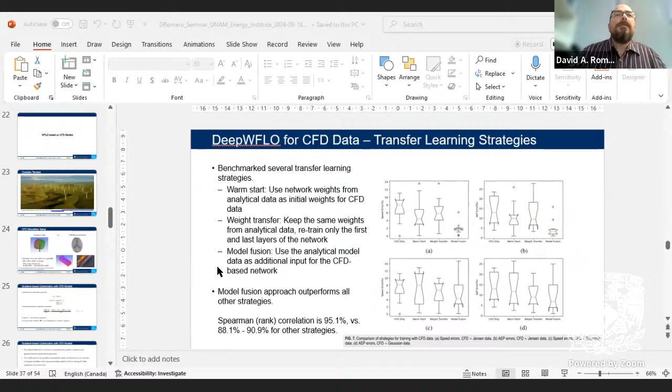Okay, let's do that right now. Okay, I think you should be seeing my slides projected. Okay, we can see your shared screen. Okay, so thank you very much.

Well, thank you very much for the invitation to speak today. It's an honor to be part of this seminar, which I would like to attend in the future to learn about the interesting research you guys are exposed to. As Carlos mentioned, my topic today is physics-based, physics-informed, and data-driven methods for wind farm layout optimization and control. The idea today is to go a bit over the work our lab has done over the last few years.

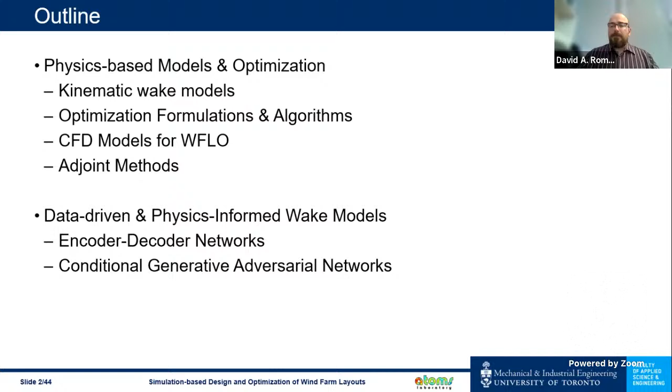It's a bit of a summary of previous work and some description of current focus areas. In terms of previous work, we'll talk about physics-based models and optimization, which has been our work until probably a couple of years ago, and more recent work in data-driven and physics-informed neural networks that we're using for this application.

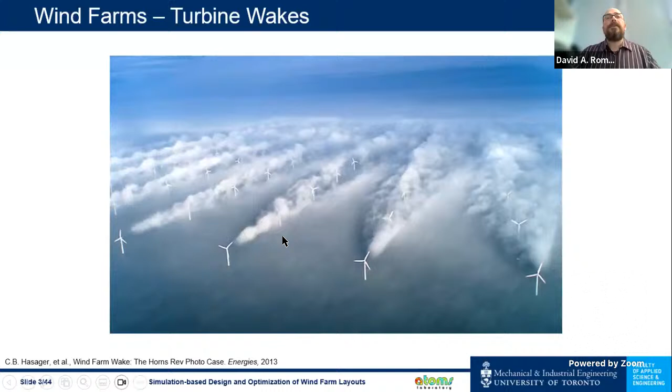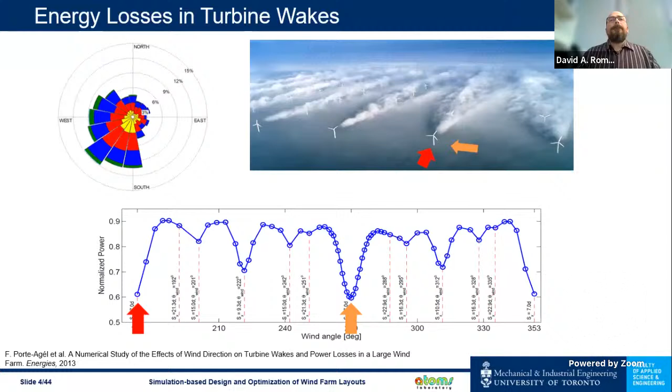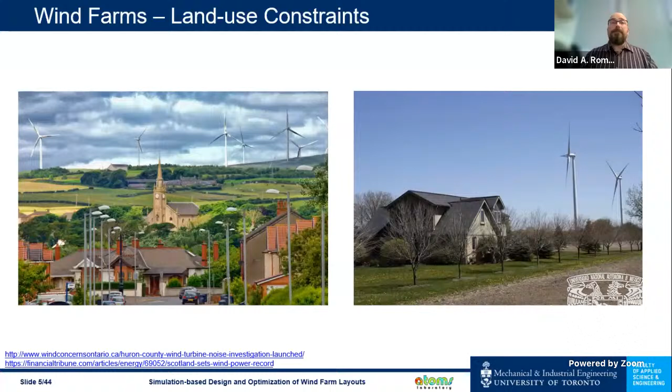So we'll go a little bit over that today. Another important aspect of wind farm layout optimization is consideration of land use constraints and environmental impact, which play a significant role in industrial practice, not so much in research work. There are many restrictions on where turbines can be placed within a given terrain, and terrain features will affect the flow, which also has to be taken into account. As an example, this information is for a jurisdiction like Ontario, Canada.

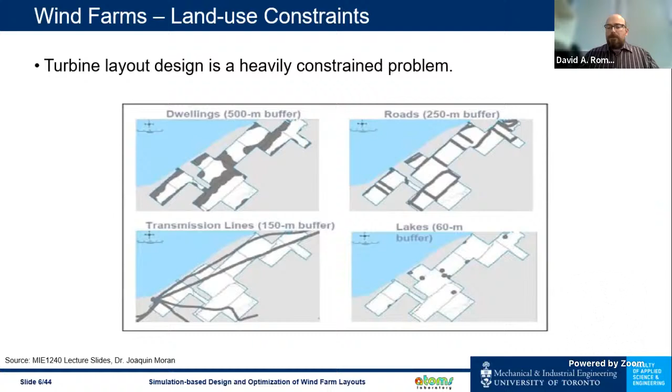So once you consider all these restrictions, instead of placing turbines anywhere, you can only place them in the areas colored here in this image. This makes what an optimal layout is less obvious, more difficult to obtain for sure.

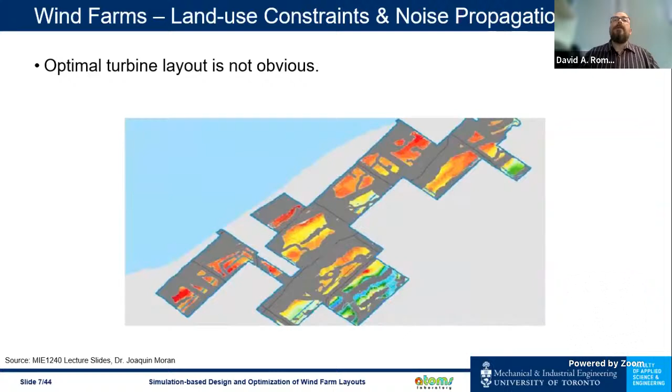Informed by our collaborations with an industrial partner that actually designs and commissions wind farms, we decided to tackle this problem a while ago. Generally, wake losses can be a 10 to 30% decrease in annual energy production.

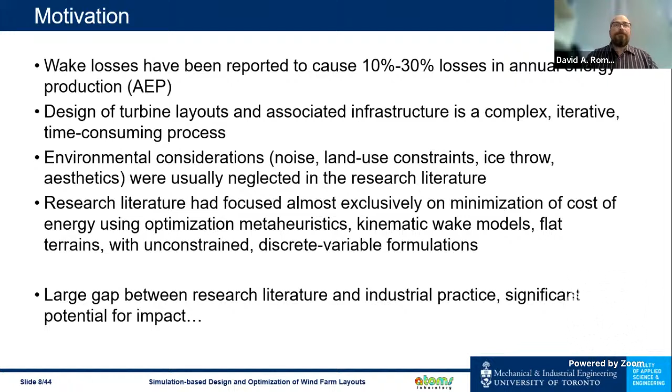Designing the layouts and infrastructure is a complex task, and there are many considerations to be taken. What we saw was that the literature only dealt with energy generation but ignored other types of constraints. So that's why we decided to take a look at this area.

So in the first part of the presentation, the optimization work we're going to see is based on what are called kinematic wake models.

Basically, if you look at the picture on the top right, that's a top view of a turbine with the incoming wind flow and sort of what the wake region is supposed to be and the effect it has on the flow. These models have different levels of using conservation of mass and conservation of momentum to try to come up with an analytical expression for what the wind speed is behind the turbine and how it recovers.

The simplest model is the one shown here. It's a Jensen model, considers a linearly expanding wake, and focuses only on mass conservation.

And the prediction of this model is what you see in the blue line in the plot in the bottom right. Basically, for whatever free stream wind velocity you have, once you hit the turbine, it decreases significantly, about 60%, and then it recovers following that pattern.

The horizontal axis is a non-dimensional distance, counting the turbine rotor diameter. So you can see that about 20 turbine diameters away, which could be up to 2 kilometers for the biggest turbines, you get 90-something percent recovery.

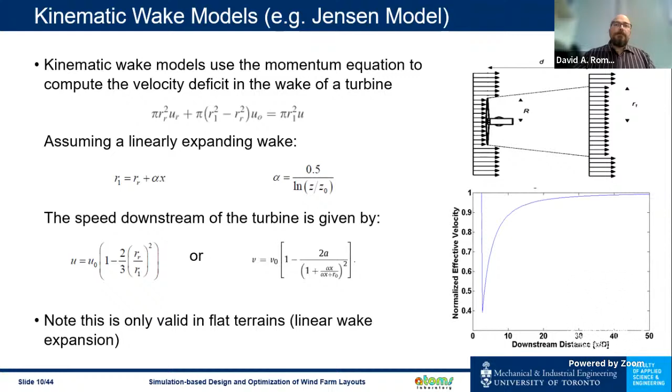But this model is only valid in flat terrains, and it has significant assumptions, but it has been used a lot in the literature and in industrial practice because it's simple to evaluate, and it gives, for something so simple, reasonable results. You will see error levels in a future slide.

The other aspect is once we have a turbine that is in the wake of several upstream turbines, we have to find a way of combining the effect of multiple turbines upstream.

And many options for that too, shown here in this slide, but the most common one, which is also the most accurate, is the sum of kinetic energy deficits, which is the third expression.

Using that, you end up with a behavior like the one shown in the bottom plot, in which after each turbine you have a decrease in the wind speed. That decrease is less and less the further turbines you get. And after the last one, you get a full recovery eventually after 40 or 50 diameters.

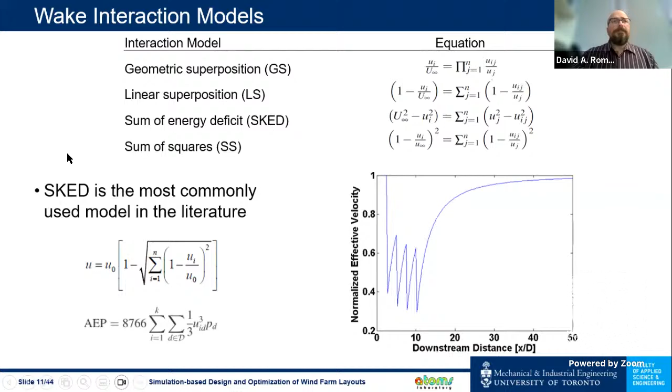So these two tools, the single wake model and the wake combination model, is what a lot of people have used for research work in wind farm optimization. And that's also the basis for the first part of our work.

So in this space, we focus on problem formulations and algorithms for solution. And we first look at metaheuristics, like genetic algorithms, those kinds of nature-mimicking algorithms.

For different types of formulations, considering the turbine locations as continuous variables or as discrete variables, and considering land use constraints or environmental impacts, different ways of formulating the problem to try to characterize really what we're dealing with.

We also use formal methods for mathematical programming, which come from the operations research community, mixed integer linear programs and quadratic integer programs, based on an approximate formulation of the problem that we created, and that was suitable for large-scale optimization.

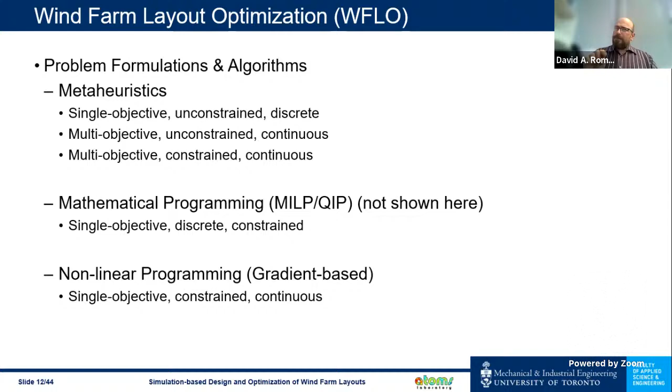And finally, we look at nonlinear programming, gradient-based approaches, which surprisingly nobody had done before. I don't think we're going to have time in this presentation to take a look at that, but we have a publication that is available if you're interested.

So to set up the stage, this is the typical work, and this was the key reference up until, I don't know, 2010 or something like that. The works by Mosetti and Grady.

They consider basically a wind farm, a rectangular or square domain, like the one in the top figure. And turbines are allowed to be placed only in the center of those squares. So it becomes a discrete variable problem.

And then they solve this problem with genetic algorithms. The objective function for that optimization was to reduce, in the bottom left, a combination of the total power produced and the cost per unit power. Results are like the ones shown in the bottom right by Mosetti and Grady, about 10 years apart.

You see different results, very different layouts, because this problem in particular, when you set up 30 turbines in a wind farm discretized into 100 squares, there are many optimal solutions that are equivalent, and you are seeing two of those here. Intuitively, we would have designed the Grady layout, but the Mosetti layout has an equivalent energy production.

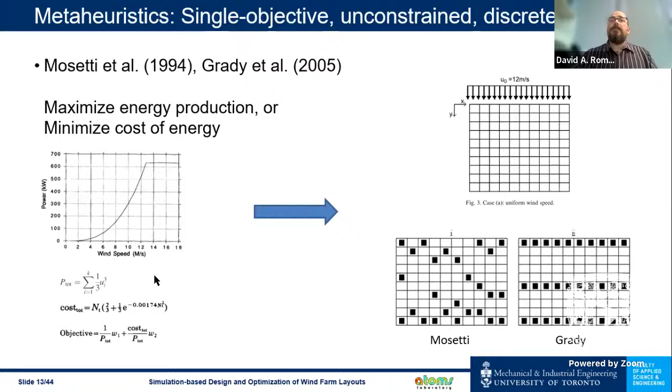So we took this problem and then we expanded it to make it multi-objective, considering now one of the effects of environmental impact, particularly noise generation.

On the top right, you see predictions for a given layout of what the velocity field will look like and what the sound pressure level map is. Sound pressure level is predicted using ISO standard method of calculation, using sort of regulatory work for this purpose. Energy generation is the Jensen model with the sum of kinetic energy deficit.

So the expressions for the two objectives are there in the slide. The sound pressure is measured at a series of noise receptors, which are the red dots on the bottom left - that's the wind farm domain. 7 turbines are shown there, and we are maximizing the energy production of those turbines and minimizing the average noise on the red dots on that domain. That's the optimization problem.

And we solved that for many numbers of turbines for different wind regimes. A typical result is what you see in the bottom right - it's a Pareto set of solutions. Typical for multi-objective problems, we don't get one solution, we get a set of non-dominated solutions. Please note that the horizontal axis, which is energy production, is reversed, so the better layouts are towards the left.

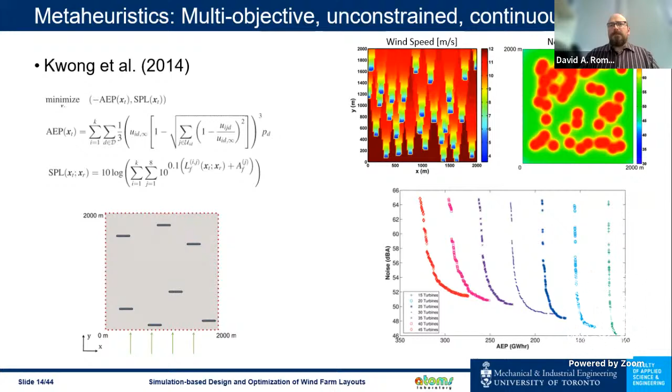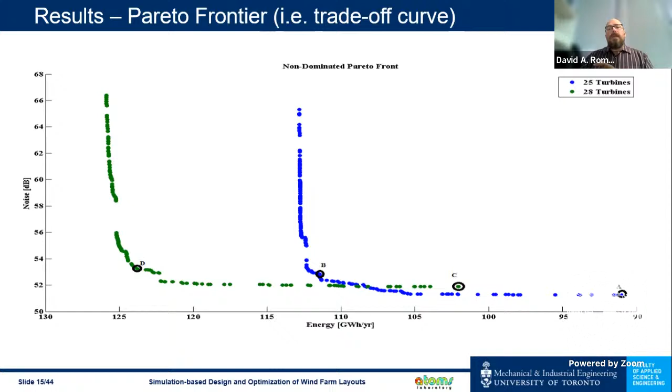So let's look a bit in detail into what that kind of result can tell us. Here we have 2 Pareto sets for 2 different numbers of turbines, 25 and 28, on a given terrain. Basically in this map, every dot is the energy production and noise level of a layout. Whatever that layout is, we don't see it here - we see the result in terms of energy and noise.

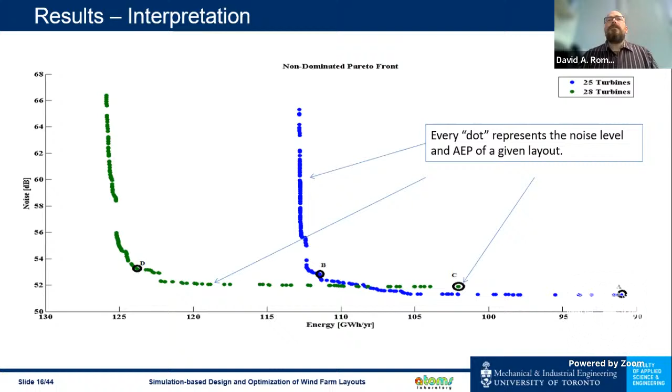And this gives us a lot of information because this curve is basically telling us what that specific site with that specific wind resource and that specific type of turbine can give us. What are the possibilities? Once we decide we're going to place a certain number of turbines, this is what we can achieve, basically. So it's very useful information in terms of design.

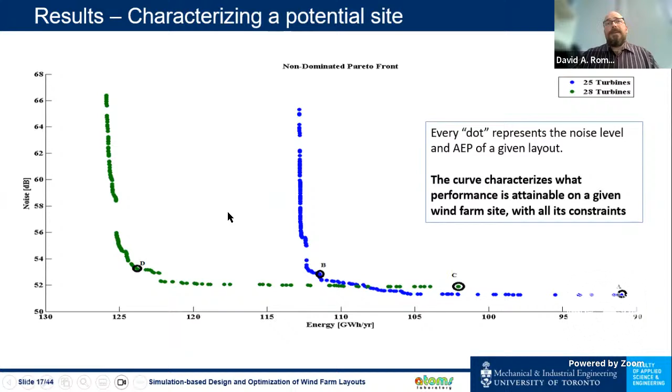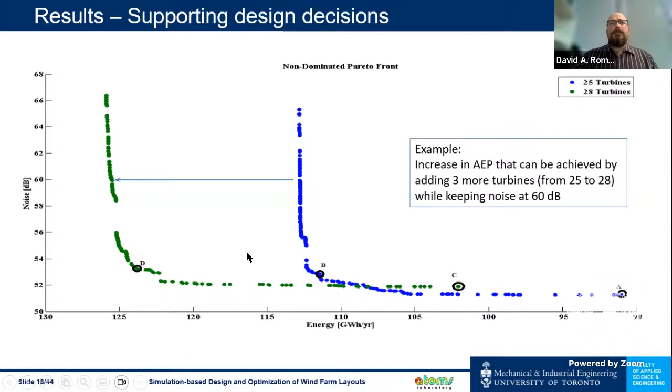It also has a nice interpretation. For example, if we make this comparison along the blue line, that's how much extra energy we're going to get per year if we add 3 more turbines without increasing the noise level. We can make these kinds of comparisons for different numbers of turbines or noise levels.

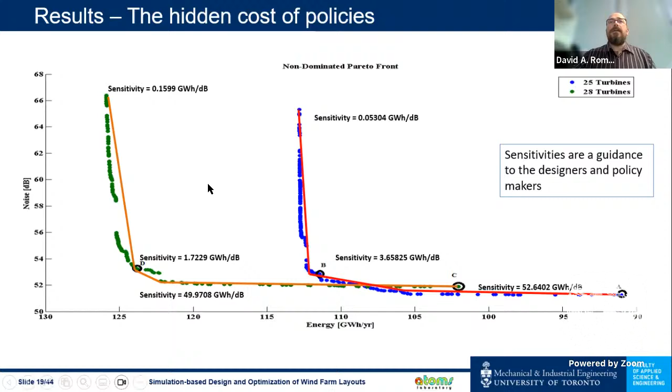Also a rough interpretation, more intuitive, not necessarily mathematically perfectly sound, is to look at this sensitivity, because the slope of these lines tells us what's the price of the noise regulation. Looking at the red line at the top, we get the idea that for each decibel of noise that we are allowed to accept, we gain 0.05 gigawatt-hours of energy. That's really indicating the trade-off between energy and noise in this site. And because energy has a price, it also gives us the price of the regulation, allowing us to look at regulation in an economic context as well, not only in terms of pollution.

And we can easily see that as much more area is available for us, we are able to achieve larger energy productions with lower noise levels at the receptors. So again, important information for design and also regulation.

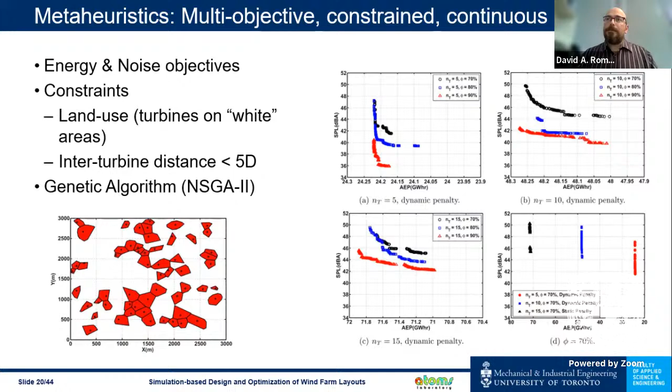One additional aspect is that from the point of view of the wind farm developer, a plot like this can indicate how important a certain area in the wind farm is in terms of achieving an economic objective. So that also puts a price on the negotiation for that contract for land use. Our industrial partner was very happy about this type of representation and messaging that we could get just from solving an optimization problem with enough of the context that really happens in industry.

So in terms of our work in this area, we consider multiple optimization formulations: constrained, unconstrained, multi-objective, single objective. For multi-objective cases, we use genetic algorithms and metaheuristics, both for the constrained and unconstrained formulations.

We didn't show here the mathematical programming approaches, but those were very successful because the methods from operations research can put a theoretical bound on how far we are from the optimum. That's also valuable information, because metaheuristics don't have a guarantee of convergence. These methods, even if they don't converge, tell us how far we are from the solution, which is also very useful. Finally, also not shown here, we did gradient-based models.

If you think about the wake model and wake combination models I showed at the beginning of the presentation, they are analytical expressions. Surprisingly, nobody had bothered to try to obtain closed form derivatives and gradients for those expressions with respect to their coordinates. So that's something we set out to do, with slight modifications in how the wake propagates to make it a continuous problem. We were able to solve the problem successfully, actually very quickly and efficiently, with these methods.

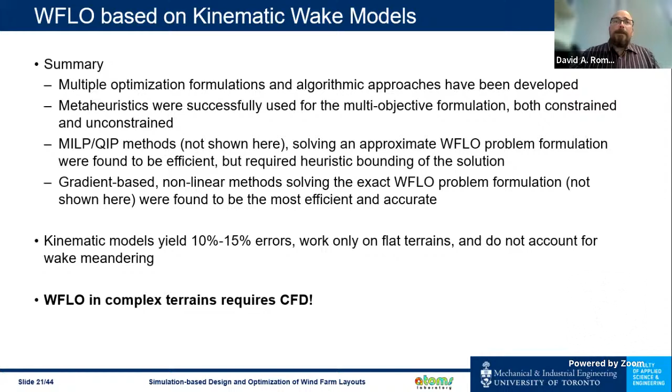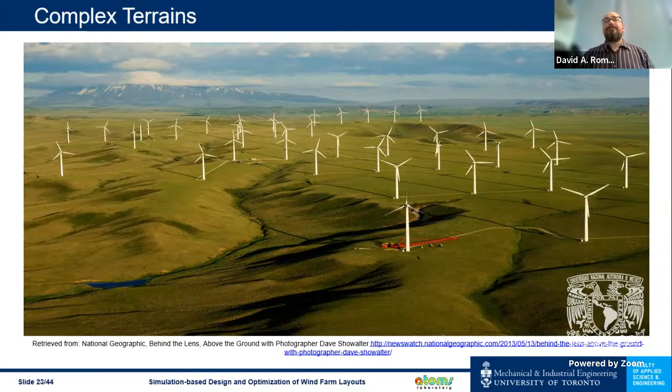So for more common applications with terrains that have certain complexity or features, we require CFD. We set out to work on wind farm optimization based on CFD models. This is an example of a terrain of minor complexity, but it still has some hills that will definitely affect the flow structures and wake propagation. We also have a nearby mountain that is an important terrain feature for characterizing the wind resource at the site and how the wakes will propagate.

For the CFD setup, we have the option of modeling all the turbines in full complexity, considering the rotors and using rotating multiple reference frames for the simulation—very complex simulations—if we want all the details of how the wakes generate, with turbulence and eddies and everything. But for the purpose of optimization, a better option is to use an actuator disk model, in which the turbine is not represented geometrically, but instead replaced by a momentum sink, basically a disk. That has basically the same overall effect on the flow, but without the details of the wake dynamics. Very useful for optimization purposes.

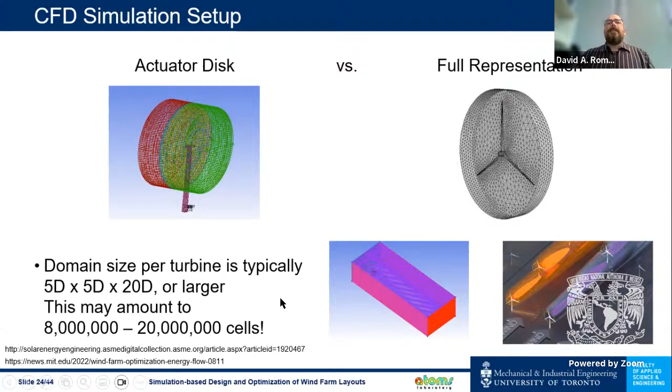We're talking about 3D, turbulent flow—computationally expensive simulations. Even though we can do these simulations, and we did a study comparing turbulence models to see which were more accurate with respect to available field data from real wind farms, it's still very computationally demanding. So for the purpose of optimization, we needed special approaches. For this application, we look at the adjoint method.

Commonly used in aerospace applications, but it's just a method to calculate the derivatives of the field variables with respect to some design parameters that may be part of boundary conditions, source terms, geometry, or whatever it is.

So the way it works is that if you were to optimize a functional of the field variables, here phi represents, for example, the streamwise, cross-stream, and vertical wind speeds, and alpha maybe some design parameters like the location of the turbines. So if we're going to optimize a functional of the field variables, for example, the annual energy production, which is an integral of the speeds over a year.

Subject to some constraints, and those constraints, G of phi and alpha, are basically the Navier-Stokes equations.

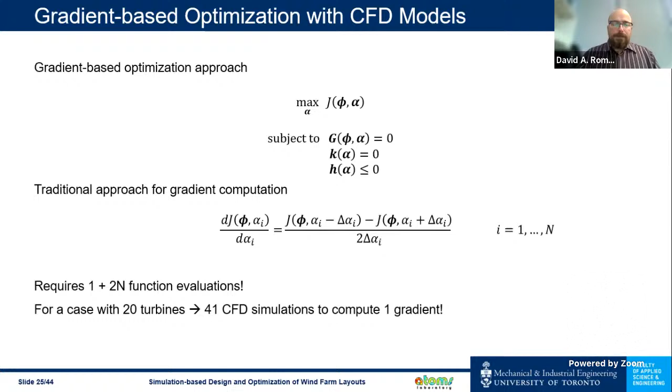To calculate the gradient, we could use a finite difference approach: do a simulation with the turbines in one place, move one of them a little bit, and get an estimate of the gradient, and do that with all the turbines. So we end up with a lot of CFD simulations just to calculate one gradient. That's really not a feasible approach for optimization.

The adjoint method allows us to compute the gradient with much fewer evaluations because it makes the gradient independent of the number of variables that we need to calculate it for. The computational cost for that is the equivalent of an additional CFD simulation. So for the price of two CFD simulations, we can get the gradient, which would take 41 simulations if we used a finite difference approach.

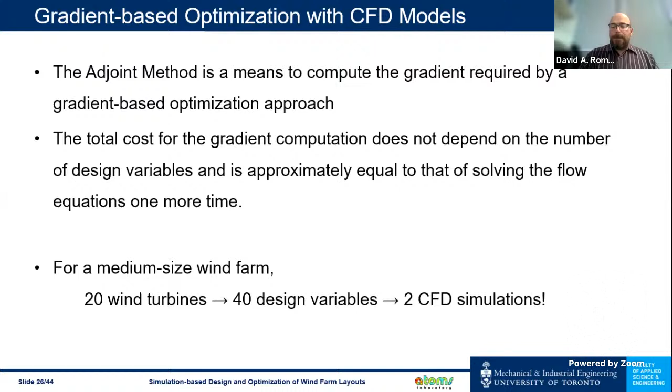So for the adjoint method, I'm not going to go into details. The formulation is quite complex. I'll show you an example of an equation coming out of it that is a bit scary.

But the idea is that instead of having the optimization problem as maximizing that functional subject to the constraint of the partial differential equations, G, you write it as an unconstrained problem using the method of Lagrange multipliers. You have the functional plus some term multiplying your constraint violations.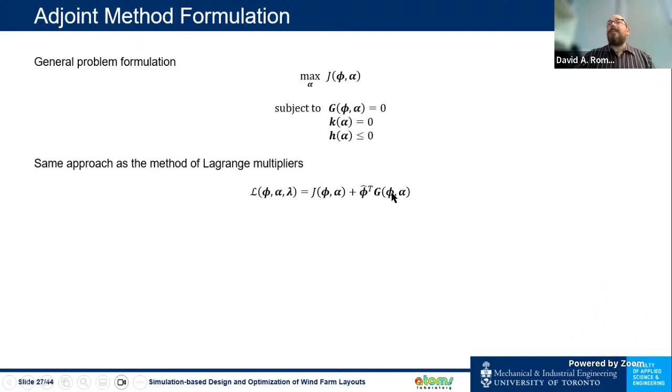And these constants here, these variables, are called the adjoint variables. So there is a nice mathematical trick that allows us to calculate that gradient, because G is zero, since those are the physical laws that the system has to meet. So that has to be zero.

And that means that we can choose the adjoint variables to be whatever we want. But with a very specific choice of adjoint variables, specifically if we choose them so that they satisfy the second equation from the bottom, then we can cancel out a lot of the terms in the gradient expression and are able to calculate the gradient easily.

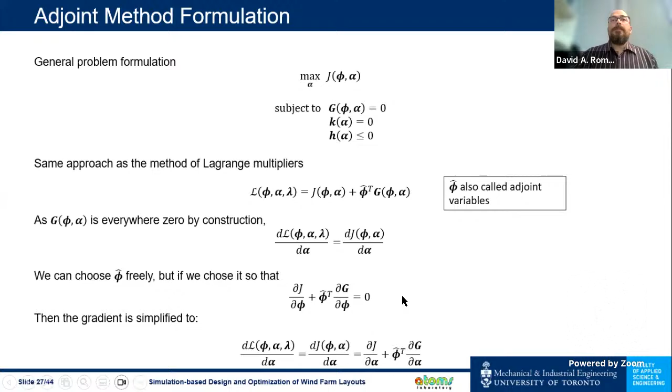This method, this formulation, has to be particularized for the system that we are applying it to. So if G is actually the 2D Navier-Stokes in laminar flow, and J is the annual energy production, and we try to do that, we end up with scary equations like this. These are all integrals of PDE-looking expressions. There's a bunch of partial derivatives and products there.

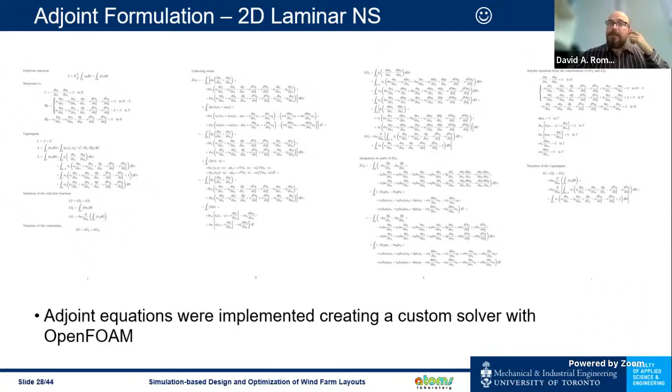What we did was to do this derivation, which was very painful, and we implemented those equations in OpenFOAM, creating a custom solver so that we can calculate the adjoint variables and then calculate the gradients. And then we link that with a quasi-Newton optimization method.

We apply that, of course, to certain validation cases, but more interesting is this wind farm in Norway. This is a real wind farm for which data is available, including the coordinates of the turbines.

So we got the terrain details from Google Earth. We have the coordinates of the turbines, which are indicated in subfigure B. And we have the wind resource, which is on the top right. Then the actual layout of the farm, this existing wind farm, is on the bottom left.

So we did that simulation to see how much energy we are estimating it will produce. And then we ran the optimization using 3D turbulent flow simulations on this terrain with the adjoint method to calculate the gradients, and we did the optimization. We end up with the optimal layout shown in the bottom middle figure.

If you look closely, very few differences can be seen. They look similar enough. So the next figure, with red dots and blue boxes, indicates how much the turbines move during the optimization. The initial positions are in red, that's the original layout, and we track where those turbines move during optimization to find an optimal layout.

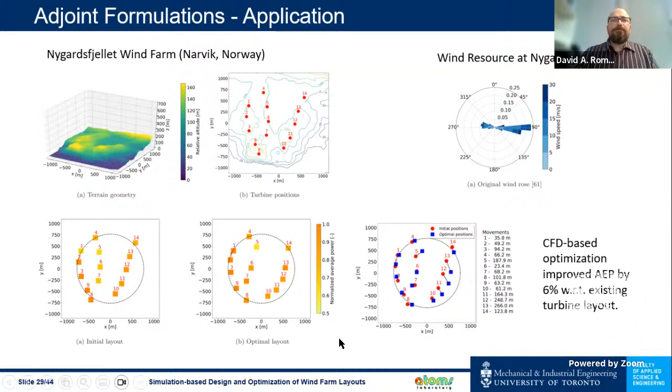So in terms of CFD models and adjoint methods, summarizing, we proposed this method to do the CFD simulations. We validated those against field data, and then we implemented the adjoint method to do optimization. It works well, but computational cost is definitely an issue. Of course, if you are designing a wind farm, that's a one-time thing done at the beginning of the project, so it justifies the cost for an optimization.

But if you start adding additional considerations in terms of infrastructure, or structural coupling, aerodynamic-structural coupling, or considerations of accumulated damage and lifetime, then computational cost increases dramatically. This means these types of models, which are the most accurate, are not really suitable for control once the wind farm is in place. So that was a motivation to look into methods to do this kind of predictions much faster, but still accurate.

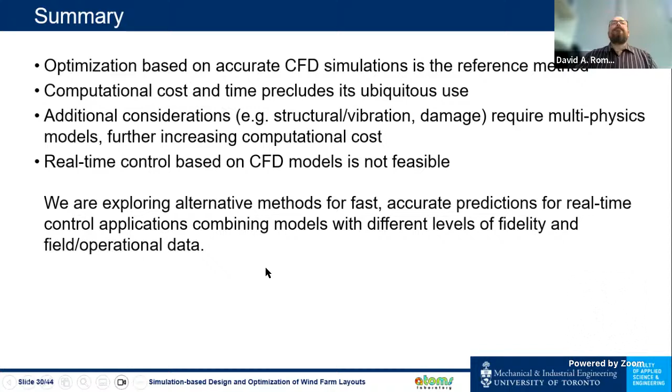And that got us to machine learning methods. Here, physics-informed, data-driven.

There is a very large literature on surrogate models, meta models used for design optimization. That's common in mechanical engineering, aerospace engineering, and many engineering disciplines. If you look at the literature, you'll see efforts in which you have a system you design with a computationally complex and costly model, by deciding a simulation campaign. You design a computational experiment, run a selected few simulations, then use that data to feed a model that guides your design process, eventually confirming your results with the simulation model itself. The idea is that it reduces the total number of model evaluations and thus reduces the cost and time needed to reach a design decision.

Many methods have been used for surrogate models, from quadratic polynomials in the response surface methodology to Gaussian processes, which are probably the most common, and of course neural networks. Neural networks were used for a long while until the 80s, then fell out of fashion. And obviously, as everyone has heard by now, they are definitely in fashion now and being used a lot.

So an attractive thing about neural networks is that they're universal approximators, given the architecture has enough capacity, meaning enough internal units, and you have enough data to train them. And they can reproduce any nonlinear function.

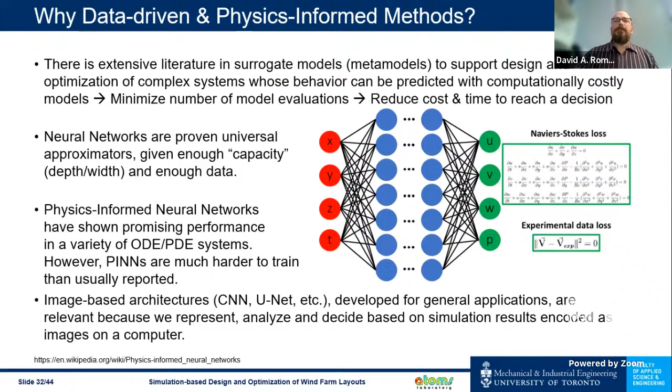To be honest, we gave it a shot, and many people have reported this. In principle, the idea is sound, but when you implement it, it's not as easy to really obtain the network that gives good predictions. Image-based architectures are also relevant here, and people hadn't really looked at them before because they are for object recognition, computer vision, those kind of applications. But as engineers, we do simulations and make decisions based on simulation results we see as an image on a screen, so these architectures are also relevant for generating those images from data. So we decided to take a look at that.

We ended up designing a network architecture like the one shown in the figure on the left. It follows an encoder-decoder pattern, which means on the top left, we take an image of the turbine layout. At this size it might not be easy to see, but you have a black square with some white dots indicating the position of the turbines, and a representation of the incoming wind velocity, the free stream velocity, which is that red square. You take those as input, and then through a series of convolutions, dense blocks, and encoding blocks, you do nonlinear transformations of those images and reduce their resolution by combining pixels, over many layers, until you end up with a small subset of what are basically variables.

So basically you are finding a nonlinear mapping between the input and a certain space. And then from that space, you do the predictions by expanding that representation again into the original size through the lower route in that figure, which is a series of decoding and dense block operations that end up giving you the flow field of the turbines in this case.

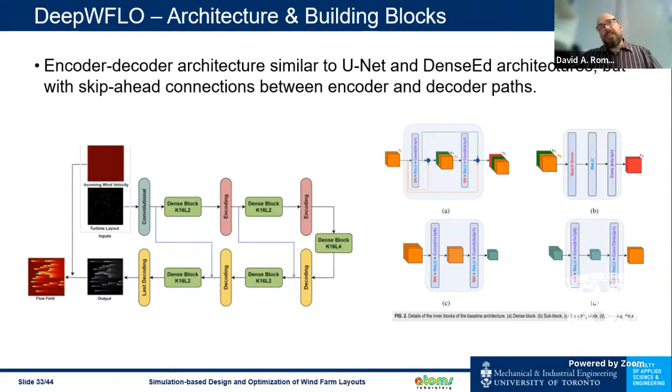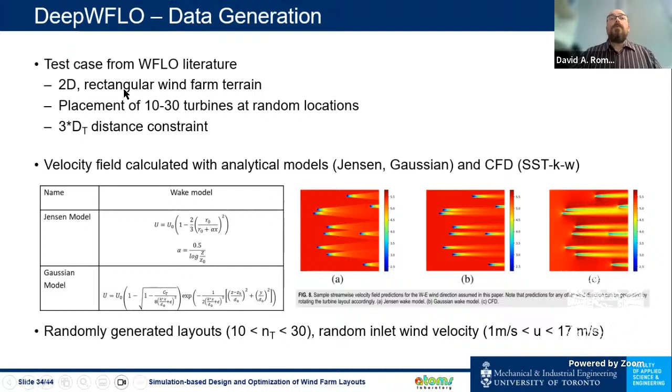So this architecture, we decided to test first with analytical models. Basically, we take the Jensen model that we used in the first part of the presentation, and also a similar model based on Gaussian wakes that has a little better prediction accuracy, to generate a lot of images of turbine layouts and the corresponding flow field. We also generate data using the CFD model, in this case in 2D, just for the sake of illustrating the capabilities of the methodology. So we generate a lot of random layouts with random number of turbines between 10 and 30 and random inlet velocities. Based on this data set, which is a bunch of images of simulation results, we train the network.

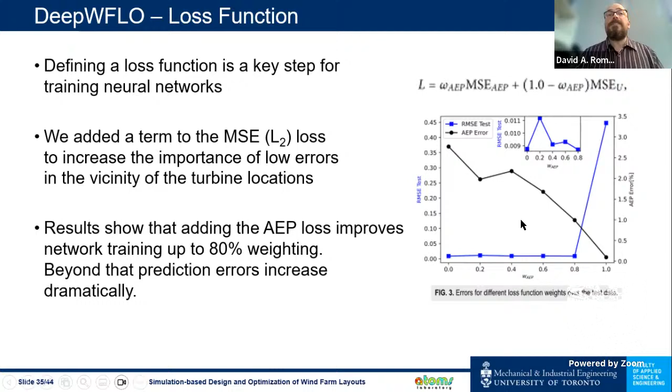With that weight choice of 0.8 for the power term, we characterized the performance of the method in terms of the effect of the resolution of the images. Remember, we generated flow fields randomly, encoded as images of different resolutions. The resolution may be important, and also how much data we need to train the network.

We find that to be a reasonable result in terms of potential applications. Then we explore an important part, which is that this approach of using neural networks allows us to integrate data from different models. For example, you could use data from analytical models like Jensen and data from CFD models together to train a network that will be more accurate than just an analytical model. So integrating sources with different levels of fidelity is something these networks can do well.

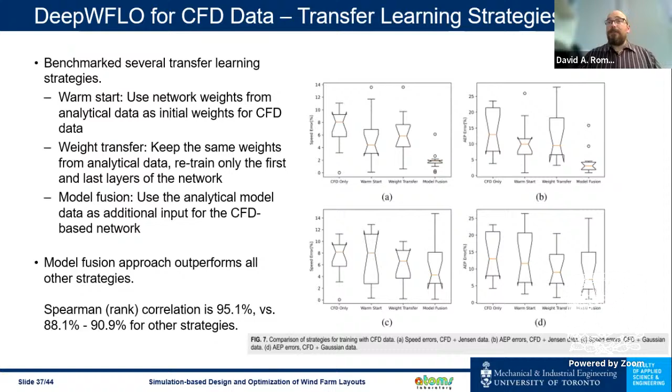Not only do we achieve very low errors for predicting speed and power, but an important aspect is that the rank correlation between the predictions is 95%. That means the predictions preserve the order of the solutions. If you were to sort them out by their power production, the neural network model will sort them out correctly 95% of the time, which means the model can be used for optimization, because optimization is really about relative ranking of solutions. So we were very happy with the results in this case.

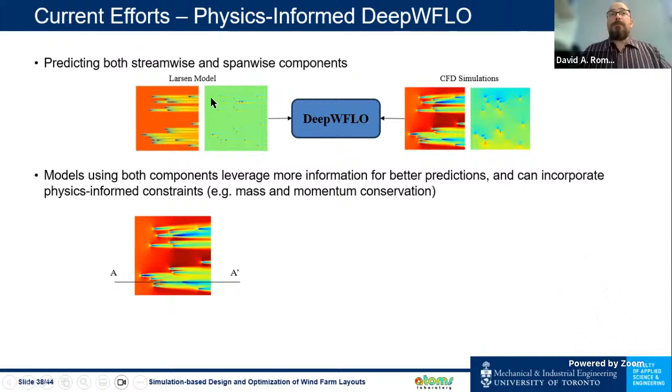That takes us to what we have published so far. Current work: we are now training networks to predict different components of velocity, so now we're predicting not only the streamwise but also the span-wise velocities, based on analytical models and CFD simulations. Our initial tests show that when we train a model using both components, we get much better prediction results.

This figure shows what a cross-section of a flow field will be. At that line A prime, if we take a cross-section of the flow field, we can see that the blue line is what an analytical model would predict, the Larsen model. The black line is what the CFD result will say, and the red line is what our neural network model says the speed profile is. As you see, very accurate results with only a few simulations. The results of the network can then be used, the trained network can be used to predict the behavior of any layout.

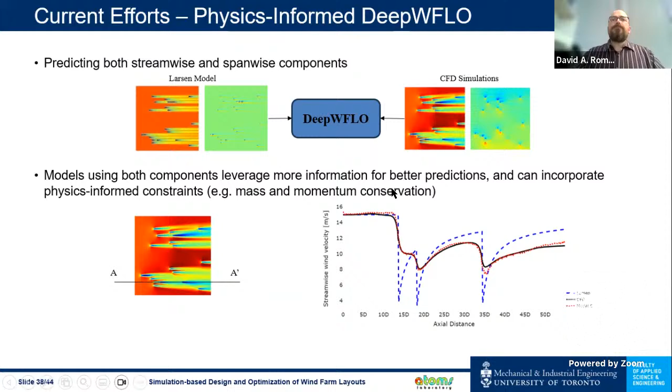We're also working on incorporating the effect of yaw angle, which is the angle between the turbine and the incoming flow field, and adding physics to the networks in terms of the continuity equation and Navier-Stokes to obtain accurate results.

You can see in the figures the comparison between the CFD results, which we consider true for this purpose, and what the neural network model predicts, indicated in blue. For different yaw angles at different positions behind the turbine, we're predicting the cross-section of the velocity field rather well. This opens up applications for wake control, because these models, once trained, run in microseconds to milliseconds—an accurate and fast prediction.

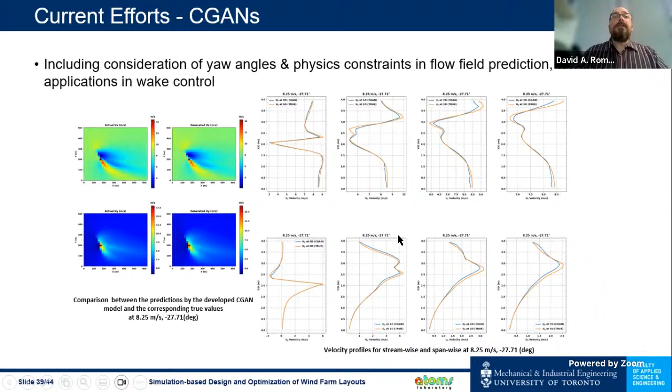This is the type of work we're focusing on now. So to summarize what we've presented: we started in the first part with work focused on optimization of the farm layout using analytically based models for wake prediction. We focused on understanding how the different formulations behave and what kind of algorithms are good for solving them.

Then we moved on to problems in complex terrains, which require CFD methods. So we developed those CFD models, characterized their accuracy with respect to field data, and then used them in the context of the adjoint method to optimize based on what are really the best prediction models for this application. More recently, we've been focusing on neural networks and machine learning applications, so we can do these predictions as accurately but faster, to enable real-time control.

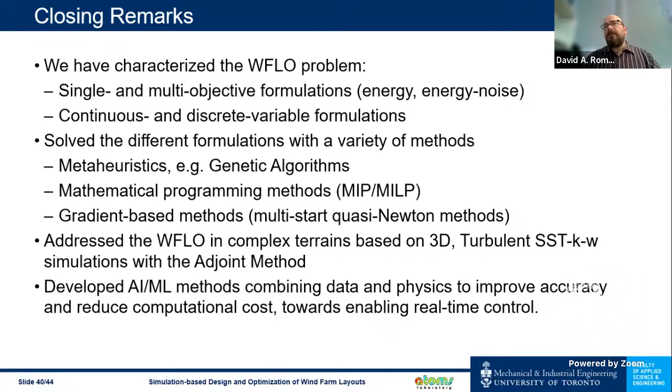And with that, we'll conclude my talk. If you have any questions, I will be more than happy to answer in English or Spanish.

Thank you very much for opening the opportunity to ask questions in Spanish. So if there are people here who have doubts or want to comment about the presentation, you can do it in Spanish if you want to. So I think there are no questions yet, but I'm curious.

Diego Arturo Canul Reyes asks: how does the duration of the wind field time series used as input data affect the performance of the optimization models you presented? Do you use any methodologies such as PCA to capture seasonal or diurnal variability of wind resources more efficiently?

Sorry, can you repeat that please? Okay, I think the first question—how does the wind field time series used as input data affect the performance of the optimization models you presented? Okay, answering that...

We start from a statistical distribution of the wind, which is typically measured on site and correlated with other atmospheric models, given as a wind rose. So we have a probability distribution for wind speed and direction, and that's used to evaluate the annual energy production. From the model's point of view, we don't use that directly—we focus on a model based on a single speed and direction, which can be evaluated for different rotations of the layout. Then using the probability distribution, we calculate the expected value of annual energy production, which is what we really use. So we focus on the building block, a single model for a given wind speed and direction, and then, as needed, rotate the layout and use the same approach to calculate what happens at different angles, integrating over that probability distribution.

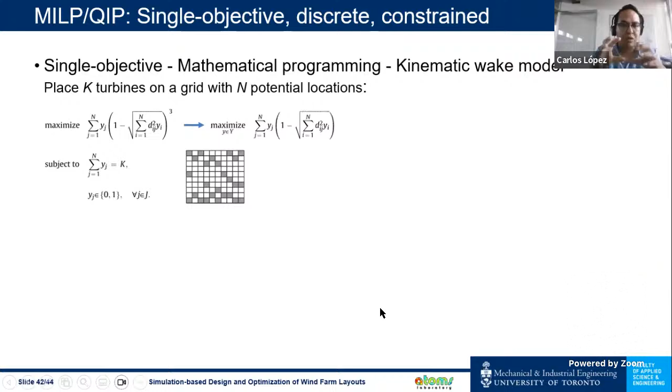your machine learning model and CFD, because you have to have a lot of CFD data, right? And the CFD data by itself takes a long time to finish, right? So what is the process? Let me just focus on the Reynolds number, where you have a lot of different Reynolds situations happening in a wind farm layout, right?

The atmospheric Reynolds number, not the one relative to the wind turbine rotor plane, right? And how do you manage to control that, because you have diverse situations occurring in a wind farm?

So how do you manage the big data? The data so far is not as big as you would think. We're talking about tests with 200 to 300 simulations, which is certainly not for your laptop, but not terrible. And we have explored different ways.

In our initial efforts, we were working with normalized flow fields, so that we would remove that effect. But we decided to incorporate the speed at the scale it is, so it's unnormalized flow fields. We basically have to generate simulations for the same layout with different speeds, and of course for different layouts.

So as long as our data set has enough of the variety that it needs to have, then we're able to capture it. Of course, we're still working on this, but based on results we have had in the 2D case and with image-based approaches, not a lot of data is needed, not as much as you would think.